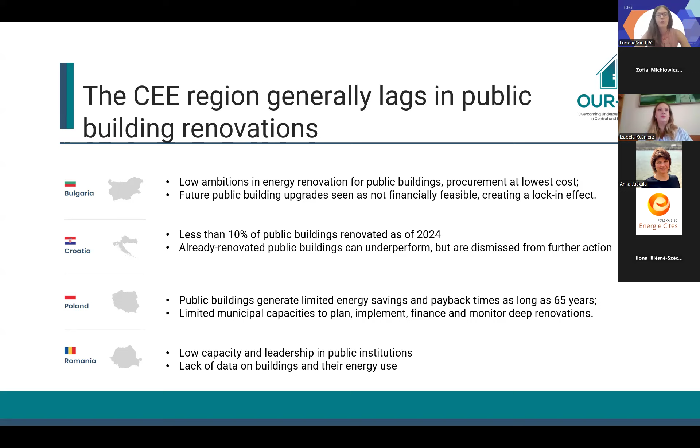And last but not least, in Romania, there's generally low capacity and leadership in public institutions at national and also local level for really aiming high when it comes to renovation of public buildings. And there is a pervasive lack of data on buildings and their energy use, as well as the status of their renovation or upgrade.

So underperforming renovations are driven by several risks here.

I'm so sorry for the cough.

So there are some obvious barriers that create a risk that renovations will underperform that are not just unique to the Central and Eastern European region. And these are, for example, financial barriers. So deep renovations, high-performing renovations tend to have high costs associated, and efforts in improving renovation tend to be fragmented across the supply chain. So there's relatively uncoordinated action when it comes to setting targets and ambitions for improving renovation performance.

And there's a couple of other drivers and challenges that I wanted to highlight here, which emerge quite strongly in the CEE region specifically. The first one is on policy enforcement. So the EU has come out with policy portfolios to improve renovation rates and depth. However, how these policies are transposed and then implemented in Central and Eastern European countries depends very much on the institutional capacity and the overall level of climate ambition, both of which tend to be lower than in Western Europe.

Another barrier, which I mentioned before, is the lack of data. So across the countries, there tends to be more difficult access to information on the building stock and its energy performance. It often tends to be insufficient and outdated. Institutional capacity tends to be more limited, so local authorities face resource constraints as well as a general lack of expertise when it comes to planning, implementing, and monitoring high-performing renovations.

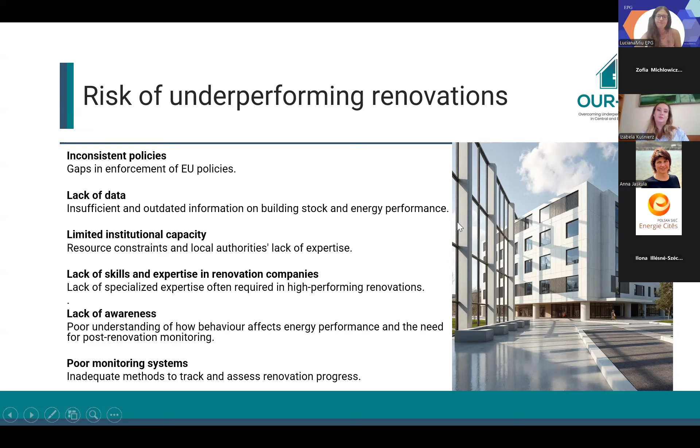So moving on to some of the solutions that we found could be applicable in this project to the risks and challenges that I've just outlined. So first off, the first part of overcoming an energy performance gap is making sure that there are the systems and capacity in place to avoid them happening in the first place. So this means ensuring that when public building renovations are planned, that they can be delivered to the expected standard of energy performance and the expected energy saving.

And this will require interventions across planning, execution, and post-renovation stages. And institutional and professional capacity building must be an integral part of that, as well as public awareness and regulatory and financial incentives that more clearly tie the post-renovation performance to the funding that's being made available for that renovation.

And I know I've stressed this already a few times, but it bears repeating on the post-renovation monitoring. This will be essential to overcome behavioral inefficiencies, plan and improve any future upgrades as necessary, and ensure that public funding is spent effectively. And especially in Central and Eastern European countries where the fiscal space tends to be quite constrained, this is going to be a crucial element of scrutinizing the spending of public funding. So overall, this is how to ensure that underperforming renovations become a thing of the past.

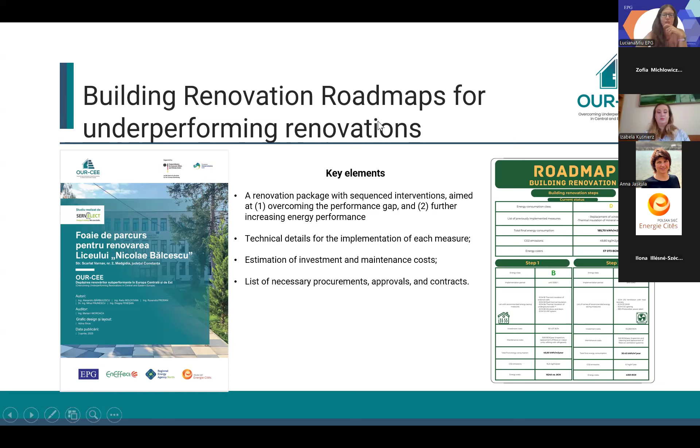And last but not least, a list of the necessary procurements, approvals, and contracts, which is quite useful, especially for buildings that might have a special status where interventions might be limited in terms of permitting, what exactly steps need to be taken. So the feedback in general from the local authorities that we worked with was quite good, that these roadmaps were quite useful tools for planning the future work on these buildings. And whether or not they become blueprints for tackling underperforming renovations really depends on how seriously underperforming renovations are taken in the policy frameworks of these countries.

And so just lastly, to wrap up, where next, the main recommendations that we provide from this project are broken down into 4 categories, many of which I've already covered. But the first one is regulation and financing. So policy needs to be more ambitious on the rates and depth of renovations. Requirements should be tightened on building owners for reporting their building data and their energy performance, so we can have an accurate image of the situation in Central and Eastern European countries and be able to target interventions, start with low-hanging fruit and areas where intervention can be done effectively, and condition the disbursement of public funding for renovations on actual achieved energy performance after renovation.

Monitoring and data, last time I go over this, I promise: require that building owners do conduct post-renovation monitoring of energy performance and plan for behavioral interventions to make sure that the performance gap does not widen after the users begin using their newly renovated building, and develop national databases that reflect the real-world outcomes of public building renovations. On capacity building, we still have a gap which needs to be covered by training the stakeholders, crucially the owners of public buildings and local governments, as well as energy renovation professionals, to make sure that the renovation works themselves are executed in a high-quality way.

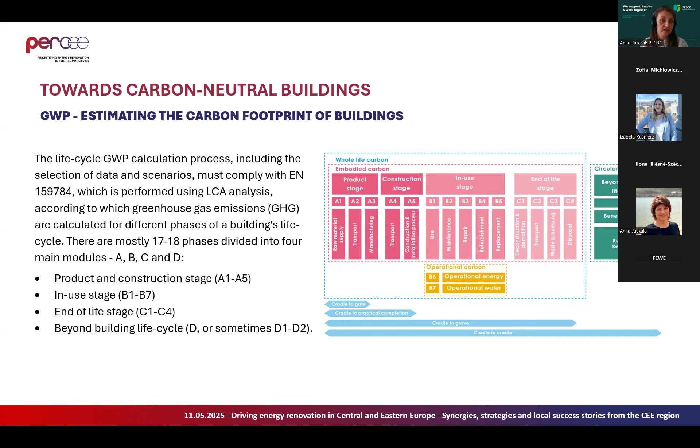On this slide, you can see the life cycle of a building, or all the stages of the life cycle. So the calculation process, including the selection of data and scenarios, must comply with the norm which I mentioned before. And it is performed using LCA analysis, according to which greenhouse gas emissions are calculated for different phases of the life cycle. So there are 17 or 18 phases, depending on whether we consider phase D as one phase or two. And they are divided into four main modules, A, B, C, and D. So the A phase is the product and construction stage. Module B is the in-use stage, module C the end of life stage, and D is beyond the life cycle.

So here I will give you an overview of the front-runner European countries in terms of implementing whole life carbon measures in legislation.

In Sweden, it is required to calculate only embodied emissions, but in France and the Netherlands, they have to cover the whole life cycle. But the operational emission is not included in the regulatory instruments that concern the whole life carbon, but in separate regulations. Denmark and Finland, they fall between the two countries, specifying certain modules to be calculated, taking into account operational emissions. In all of the 5 countries, the regulations apply always to new residential and office buildings.

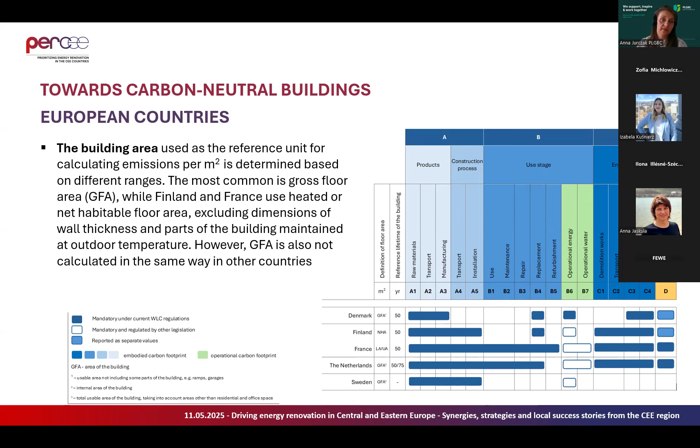For the building area that is used as a reference unit for calculating emissions per square meter, it is determined based on different ranges. So the most common is gross floor area. In Finland and France, they use heated or net habitable floor area, but they exclude the dimensions of wall thickness and parts of the buildings maintained at outdoor temperature. What we have to bear in mind is that the gross floor area is not always calculated in the same way in all of the countries.

When it comes to databases of emission factors for construction products and processes, they are also different in those 5 countries. They contain impact factors for all materials for which environmental product declarations are not used. The use of product-specific data increases the accuracy of calculations and encourages the selection of materials with relatively low carbon footprints. So it is always best to select the products that have the EPDs, because you can always compare the same materials within the same group and select the one that has the lowest carbon impact.

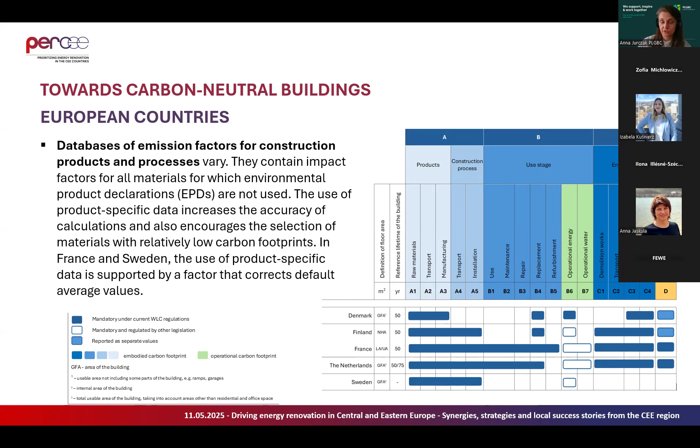In France and in Sweden, the use of product-specific data is supported by a factor that corrects the default average values. And now I will give you some more detailed information about each of those countries. How do they approach the global warming potential calculations?

So in Denmark, there is a regulation that entered into effect in January 2023. This regulation on mandatory calculation of the climate impact of new buildings applies to all types of buildings that are covered by the existing energy consumption regulation. The buildings that have more than 1,000 square meters have to meet the limits to get the building permit. But for the smaller ones, the calculations must be done. However, they do not have to meet the limits.

The life cycle range that is taken into consideration in the calculations is A1 to A3, B4, B6, C3, C4, and D. D is mandatory to be calculated. However, it is not included in the total sum, and the total sum is compared with the limits. So it is calculated, but it does not have to meet the limits. And since its entry into force in 2023, the limit is 12 kilograms CO2 per square meter per year.

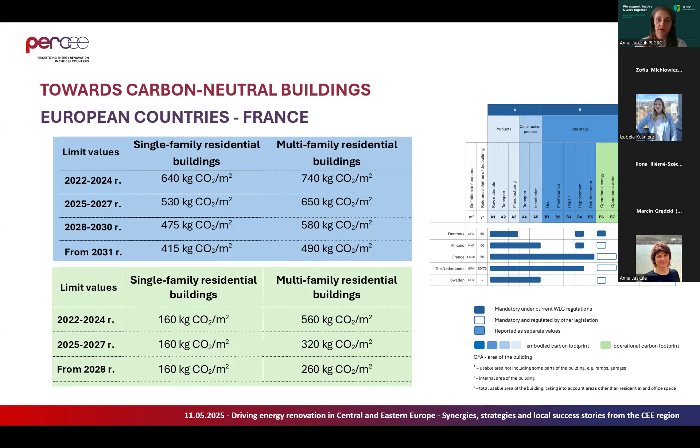And as you can see, from 2022 until 2031, the limits will significantly decrease. So there will have to be introduced different measures or innovations that could support achieving those limits. For the operational carbon, as you can see in the single-family residential buildings, the limit will stay the same. However, in the multifamily residential buildings, the limit will be practically cut by half. So it will also be challenging.

In Sweden, the life cycle range that is taken into consideration in the calculations is from A1 to A5. And it is foreseen that in 2027 the other phases of the life cycle will be introduced, but we still don't know which ones will be included. In terms of environmental data sources, a database of EPDs and generic data is available from the Boverket. It is a national agency, so the data are quite reliable.

And the values for the generic data are about 25% higher than the average value calculated for the product group, just to discourage the use of default values and rather encourage using the specific data from EPDs. LCA calculation tool: there is a tool developed by the Swedish Environmental Protection Agency where the LCA can be performed and submitted directly to the Boverket, but it is not obligatory to use it. Other tools and forms also are allowed. The reporting indicator in Sweden is kilograms of CO2 per square meter per year.

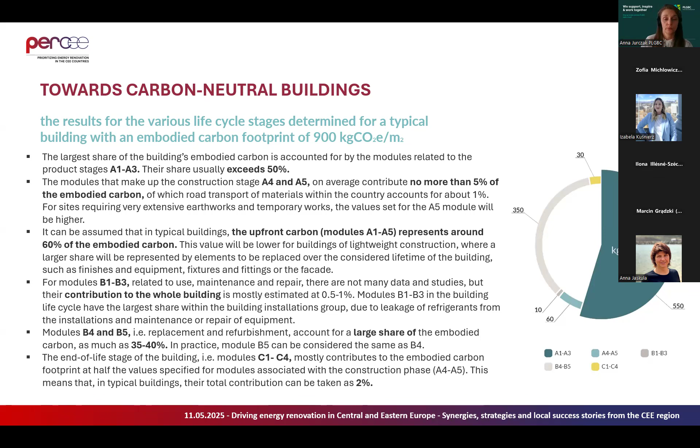Modules B1 to B3 are related to use, maintenance and repair. There are not many data and studies, but it is probable that their contribution to the whole building is around 1%. For modules B4 and B5, replacement and refurbishment account for a large share of the embodied carbon, estimated at 35 to 40%, because it is also connected with building in new materials, replacing the old ones with new. So this is still connected with the product phase. The end of life stage, C1 to C4, mostly contributes to the embodied carbon footprint at half the value specified for the construction phase. In typical buildings, the contribution will be around 2%.

Okay, so here you can see the main assumptions for the simplified method, which we suggest to be used in our country to begin with something. The simplified method is focused on phases A1 to A3, which are embodied emissions in the product phase, and of course phase B6, which are operational emissions in the use phase. The product phase, as I mentioned, has a share of 50%, so it is a very significant contributor to the building's life cycle emissions.

And correctly estimating the values for this phase is very important and crucial to the accuracy of the results. The calculation of emissions for these phases is very simple and comes down to summing the emissions for each of the building components that are included in the analysis. A quantitative summary of building materials and equipment should be used for the calculations, as well as averaged, generic, or detailed specific data for products.

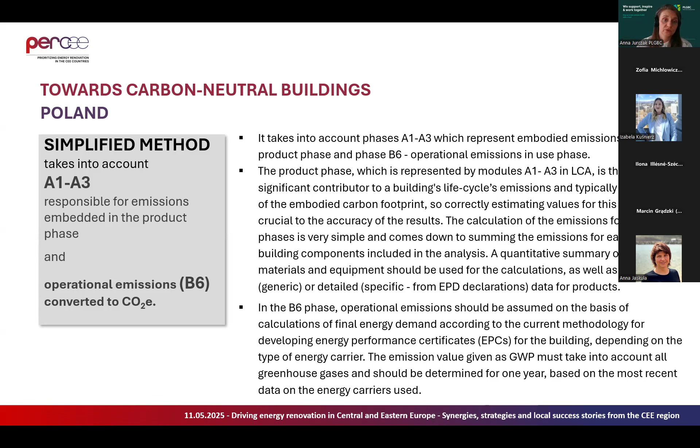In the B6 phase, operational emissions should be assumed on the basis of calculations of final energy demand according to the energy performance certificates, the current methodology for the EPCs, depending on the energy carrier that is used in the building. The emission value given as global warming potential must take into account all greenhouse gases and should be determined for 1 year based on the most recent data on the energy carriers used. So that was the simplified method.

And now I will give you a few words about the full method that takes into account phases from A1 to A5, from B1 to B4, from C1 to C4, and operational emissions, which are B6. So adding to the simplified method, which is A1 to A3, we add phase A4, which are emissions from the transportation, and they should be calculated based on the monitoring of the distance between the factory and the construction site.

The type of transport also should be taken into consideration with the emission factor in kilograms of CO2 per kilogram per kilometer, the weight of the material transported, and the loading degree of the carrier. Phase A5, which covers emissions from the construction process, should be determined by the indicator. Phase B1 includes emissions from building materials and equipment during the life of the building. Emissions related to maintenance and refrigerant leaks from installation and equipment repairs should be included in the calculations.

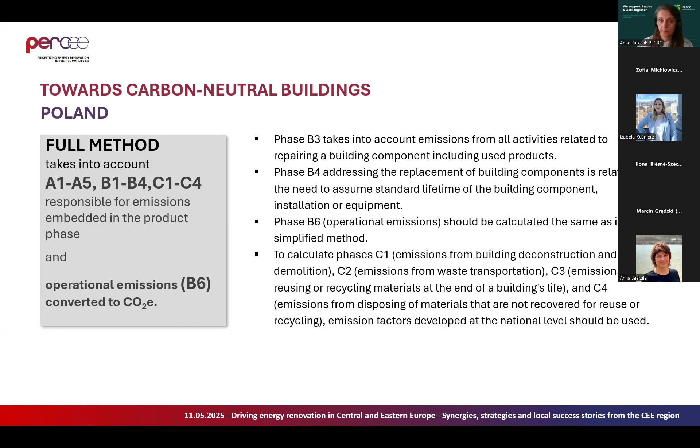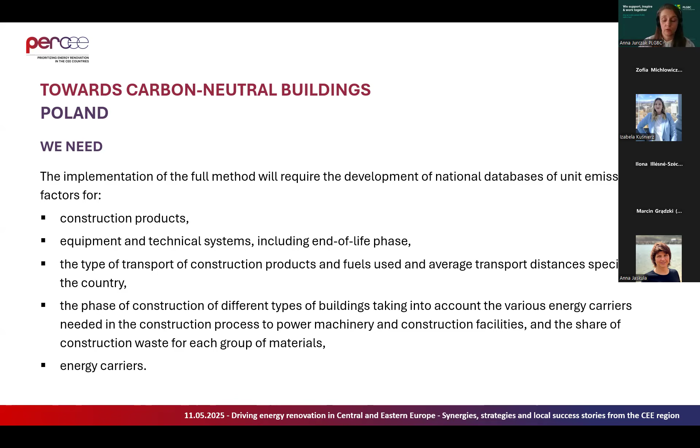So what we need to implement the full method to calculate the whole life carbon of buildings, it will require the development of national databases of unit emission factors for construction products, for the equipment and technical systems that include also end-of-life phase, the type of transport of construction products and fuels used, and average transport distances specific to the country, the phase of construction of different types of buildings, taking into account the various energy carriers needed in the construction process to power machinery, the construction facilities, and share of construction waste for each group of materials, and the energy carriers. For now, there is no data, so it is impossible at this stage to use the full method and to calculate all the phases, all the modules that I mentioned.

The need to calculate carbon footprint of buildings raises challenges and requires certain actions from the construction sector and also from the government. So it is important to make it obligatory to calculate the carbon footprint of buildings based on an accepted, uniform methodology that would be used by all the stakeholders. And the second is the obligation to carry out the LCA analysis, which would be harmonized with guidelines of existing legislative documents and the EPBD. So these two are crucial.

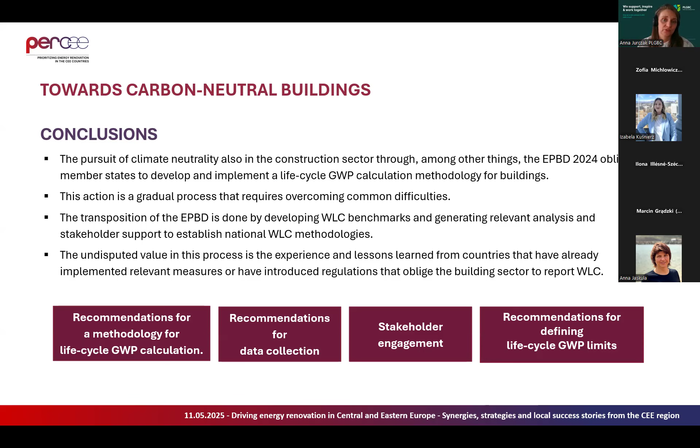To summarize what I presented you, the EPBD obliges the member states to develop the life cycle global warming potential calculation methodology. The action will be gradual, and it requires overcoming very common difficulties across the EU countries. The transposition of the EPBD is done by developing whole life carbon benchmarks and generating relevant analysis and stakeholder support to establish national whole life carbon methodologies. So here we have the stakeholder engagement that is needed for this. The undisputed value in this process is the experience and lessons learned from the countries that have already implemented relevant measures or have introduced regulations and obliged the building sector to report the whole life carbon.

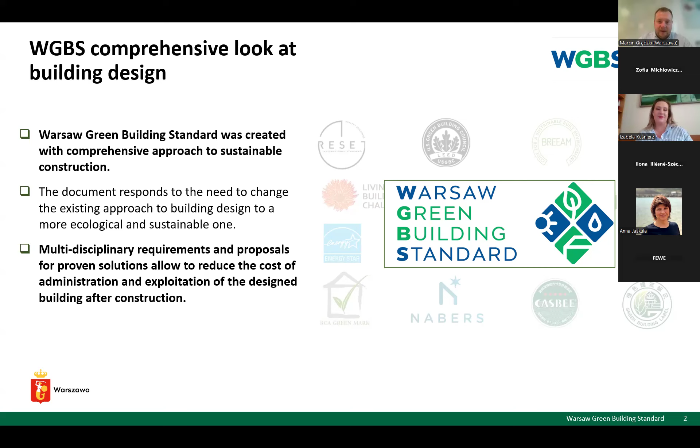We must take into account not only energy, not only environmental aspects, not only carbon aspects, but also well-being, social aspects, mobility, electromobility, bicycles, and so on. So we decided to do a new one, reaching out, of course, to the existing ones and grabbing what's the most effective, at least we thought, and we ended up with a tailor-made local municipal standard for buildings and investments. Next slide, please.

It is a local regulation, as I mentioned, so it's binding for investors from the city, from municipal companies and from districts, which may sound pretty limited, but in practice it means we have 18 districts, 100 different companies working across the city, and currently, I didn't make up that data, there are something like 4,000 municipal buildings in Warsaw. So it's pretty large scale.

And we wanted to be a leader, basically. So we thought, what should be done to ensure that the buildings made by the public sector are a step ahead of legislation, and we are a role model for private investors as well. So we practice what we preach, and that's an example. Next slide, please. Why is that so important? Because in Warsaw we collect data about emissions every 2 years, and almost 80% of the city emissions are building related.

It's either about buildings themselves, but also the energy generated and consumed in the building. So that's the sector we have our competences over. It's not energy, which is state-owned companies, but this is something we can do to make change in the buildings, in the building stock we have and will have as a city. Next slide, please.

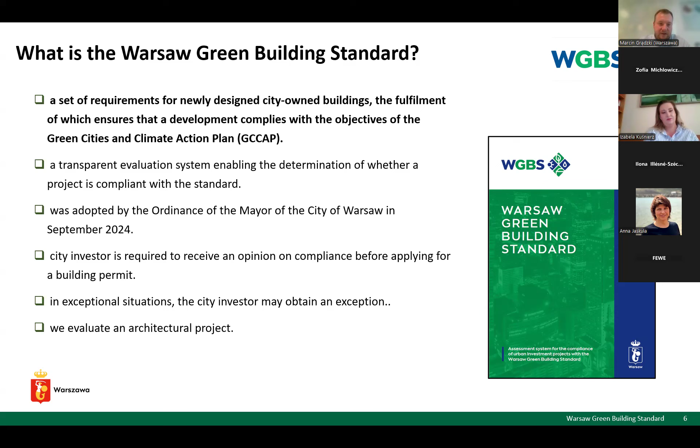It was signed off by the mayor in September last year. It is binding from July this year, but we currently have a number of buildings already checked with the standard and with a certificate. What is also very important, we evaluate the architectural project documents to make that doable and to make things happen. Next slide, please.

Yeah, I already mentioned the main goal of that. It has many different purposes and goals, but the main one is to tackle emissions, to make buildings climate resilient in Warsaw, to make buildings good for the users and inhabitants. And we as a leader, as a capital city with many ambitions, with a strong leader regarding climate, wanted to go beyond the current legislation and requirements and take a step forward.

But at the same time, we had to make a doable document. So it is not only ambitious; it is also doable and convenient for the architects, designers, and investors, who are the most important stakeholders in that process. And in the next 5 minutes, I will try to explain why it is ambitious and doable at the same time. Next slide, please.

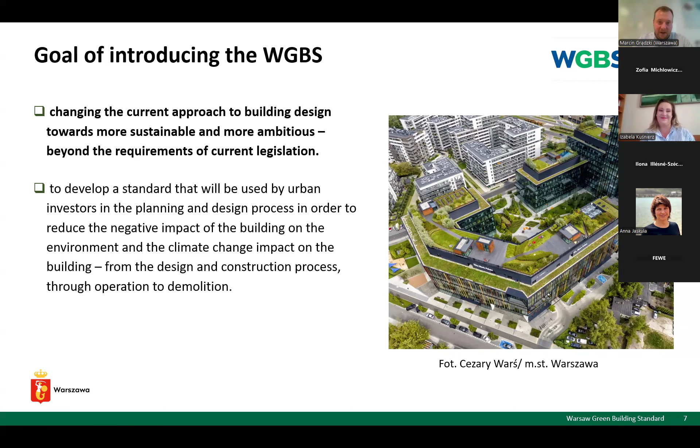So we had 100 ideas at the very beginning of how such a standard should look. Whether it should be a checklist of binding requirements, or maybe the option would be to create a points scheme with some threshold you have to reach to achieve the standard. Well, there is no simple answer to that.

The approach we took was to gather in the same room city investors from different districts, and to gather architects and designers. We cooperated with SARP, the association of architects; I don't know the English name. It's a network of architects focused on climate in Poland. We cooperated with Forum Energii, which is one of the biggest NGOs regarding buildings, and many stakeholders, basically to be on the same page and achieve a good document.

And we ended up with a cafeteria scheme. As I already mentioned, the standard is applicable for all different types of public buildings. So one document, and the way we evaluate a building, should be applicable for social housing, library, school, theater, and many different buildings. That's why we decided to create such a cafeteria scheme, which still gives you flexibility, but highlights the most important factors we would really invite our investors to take care of.

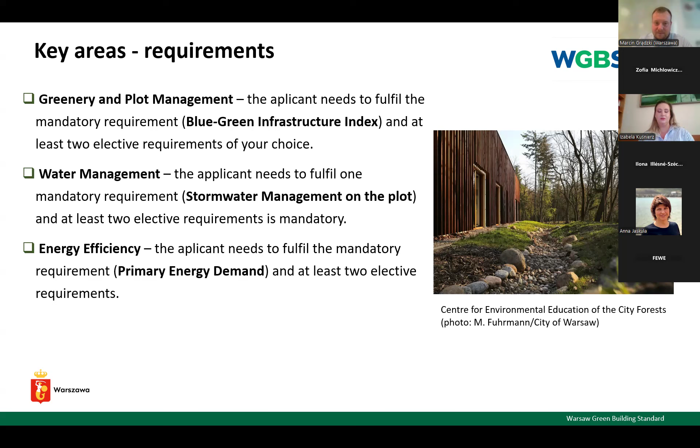Next slide, please. And we have 3 additional ones, which is mobility, where you can choose 2 of the different options. One is about bicycles, one is about the EV charging stations. It is about providing good infrastructure, but also connection to the public transport. That's one of the requirements that you have to fill.

We have an area about the circular economy and building materials and solutions. So this is where we evaluate an effort to at least find out the carbon footprint of materials, for example, or reusing the water inside the building, and that kind of options.

And we have health, comfort, and safety. Again, there is one situation where this is mandatory, which is school buildings. You have to have mechanical ventilation in a school building. But in other cases, you may choose two from 6 options to fill that field. Next slide, please.

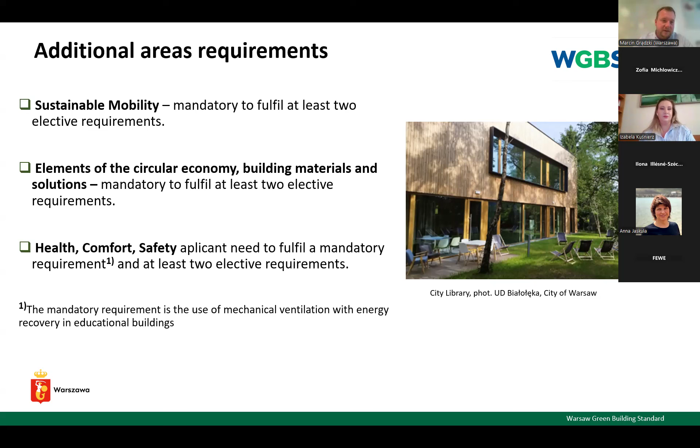The whole process must be very convenient for the investors, so not architects, project engineers, but for decision makers very often. So people in the districts, people like me, I don't have technical knowledge. I'm a civil servant, and it must be convenient for me to check if things are really happening, and if the company responsible for the project and for the documents filled the requirements.

So we leveraged the same scheme that is used in GRI reports. So we connect the requirement, mandatory or to be chosen, with the specific page and specific chapter of the documentation that is provided to the city within the building approval process, which is very convenient and very easy to fill.

And as I already mentioned at the beginning, we evaluate the building at the documentation phase. So the architect, the company that is providing documents, they already know about the standard and about the requirements after the procurement process. So this is currently an annex to the procurement documents. So it may be taken into account from the very beginning, from the starting point of the design of the buildings. Why is that so important? Because of the cost management, basically.

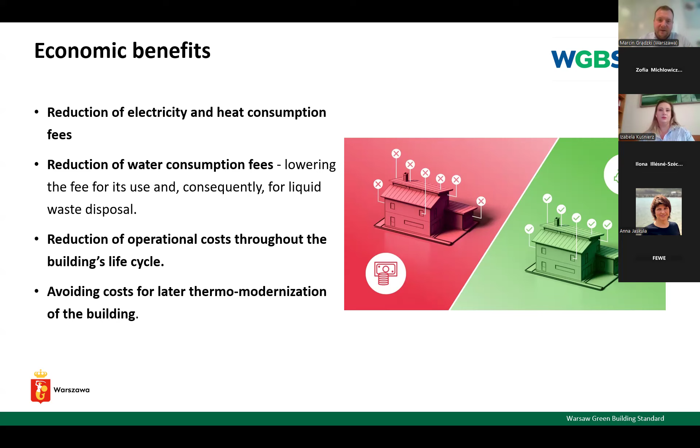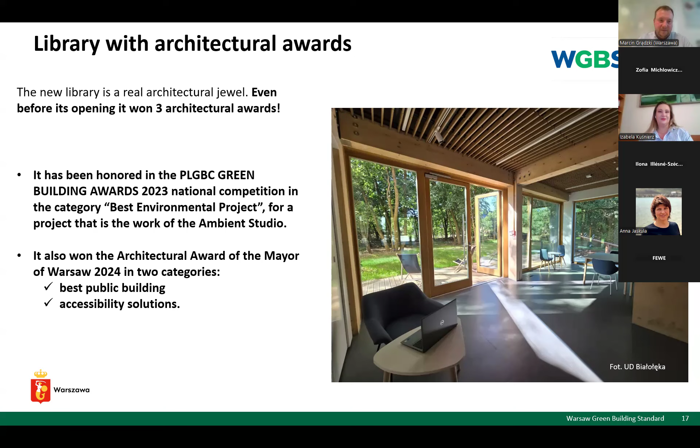In that context, I can tell you, before the standard we had some challenge with the water use in the building. So it raised the costs approximately 1% maybe of the total cost of the building to incorporate solutions that allow this building to be qualified as a green building standard compliant one. And the operational savings would pay that off in 1 year, I believe. So it pays off. And sometimes it's about 1% of the initial costs that we have to cover.

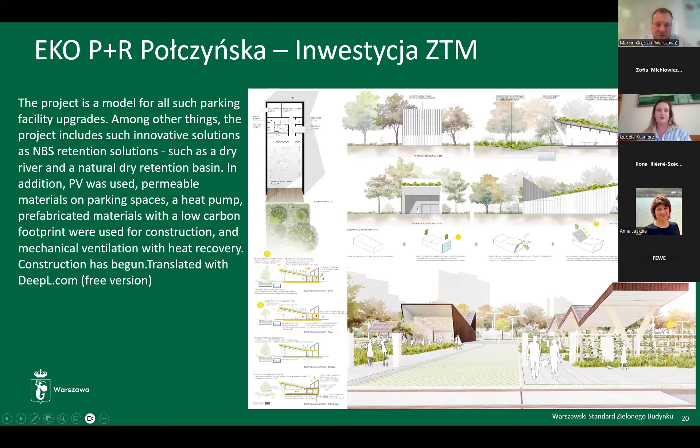And the last two slides, as far as I remember, are to show that you will receive later on the link to the document and to the checklist. But the whole idea was super recognized, not only in the PLGBC type of organizations, but also as a wider innovative solution. And I'm not talking about that because I want to brag again, but I want to invite you to check that document.

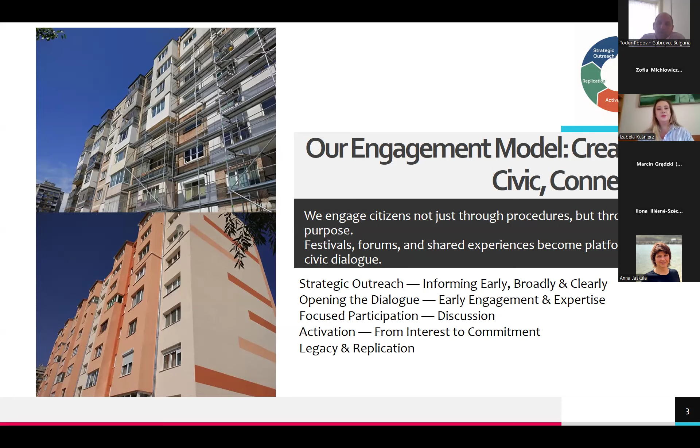As to how we organize all this, it is not just, as I mentioned, for the renovation, but these are the steps that we follow for the Bulgarian national program for renovation of multi-family buildings, and now for the new program that supports citizens to renovate their buildings, also for PV installation, and of course all the policies. This is a very working model for every policy that we need to communicate with the citizens.

And of course, at the beginning, when the policy is just accepted, or even at the level of communication and creation, the decision-making process, we start with a more specific message to the citizens using different mass communication channels like broadcast, podcast or radio, and of course the standard newsletter and papers. In detail, we started the second wave of renovation in Bulgaria with a 100% grant. This is one of the programs that we implemented in the frame of the National Recovery Plan. The first draft of the rules and requirements was known to us in 2022. The program started in 2024.

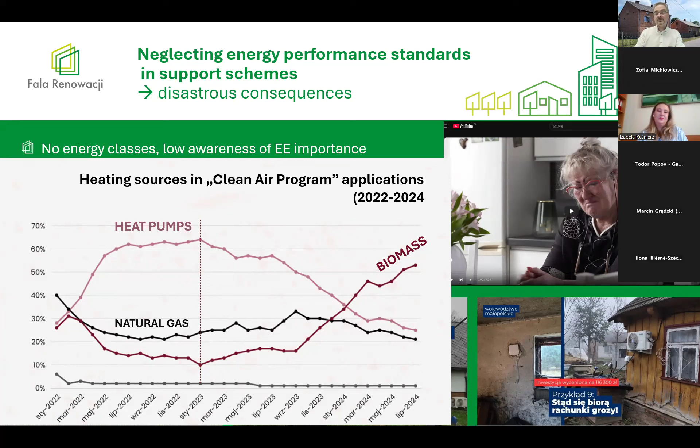And you can see the heat pumps were quite popular in the beginning of 2023. The market collapsed, and trust in this zero-emission technology will be very difficult to regain. So our support scheme for single family houses had to be suspended, and it resulted in a loss of confidence in public support.

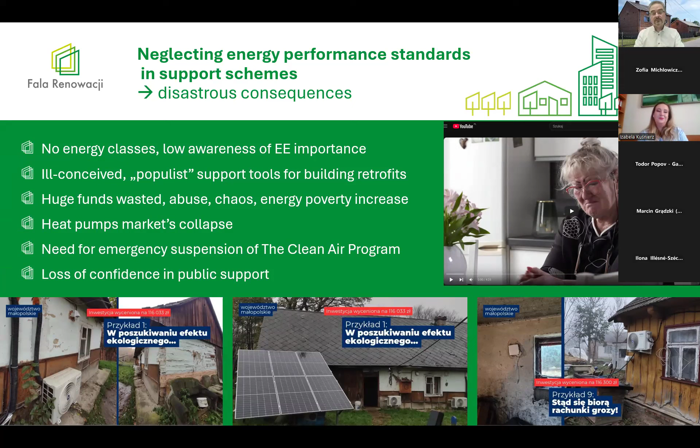So we decided to make an analysis, to provide it to the authorities, of how, if we are about to introduce an energy class system, it can be a dream tool to use when we build any support programs for building retrofits. You can download it from our website. As I mentioned, I guess you'll be provided with this presentation.

So it's in Polish, but today with AI, it's no difficulty to translate it and get familiar with it. So first of all, we went through best practices in several European countries. I will not have time right now to go through all of them in detail.

I will just show you what we saw as, let's say, a common part in all these countries we went through. We analyzed support schemes, support programs that were addressed to improving energy efficiency of buildings, and they all naturally share one common part. They are built somehow on energy efficiency that is expressed either in energy classes or indicators showing this

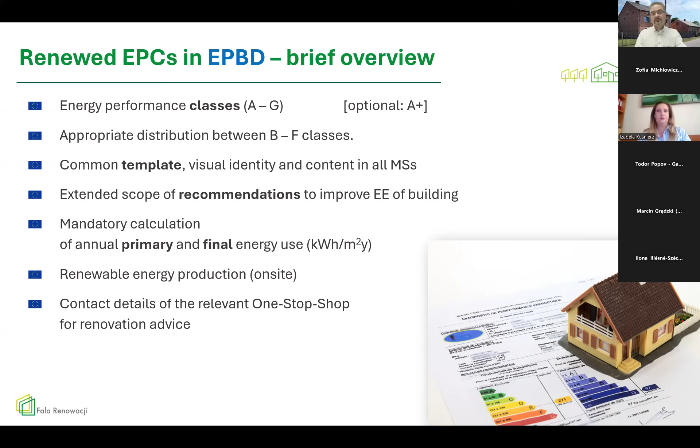So in Poland, as I told you about this Clean Air program, our major one, with the biggest budget, the biggest program to support the renovation of single family houses, it was suspended in an emergency mode in autumn last year. It was, let's say, reloaded. It was reborn in April this year, unfortunately without energy classes yet, because we don't have them. But it's a huge scale program. It still addresses 2.5 million buildings, so subsidies for approximately 2 million single family houses.

And right now it has, unfortunately, to my deep belief, an unprecedented amount of subsidies for individuals. It reaches up to 100% subsidies, which was one of the basic reasons why it failed, actually. Because when people don't have to invest their money at all, they just don't give a damn. If they were to invest at least a little of their own money, they would think twice about such an investment.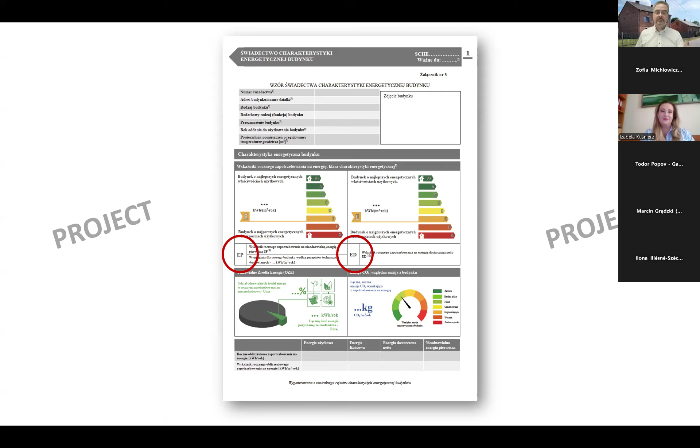And the biggest question is which energy consumption indicator we will base it on, because primary energy is not the best one. What they propose in Poland is energy net. I have no idea how to translate it. It's net energy delivered. So it's energy delivered to your house minus what you export, for example, from photovoltaics.

How to fix this EPC market right now? We need to, first of all, correct those indicators we use on those certificates. We should have a correct, even division of our buildings into energy classes, because the first proposal was